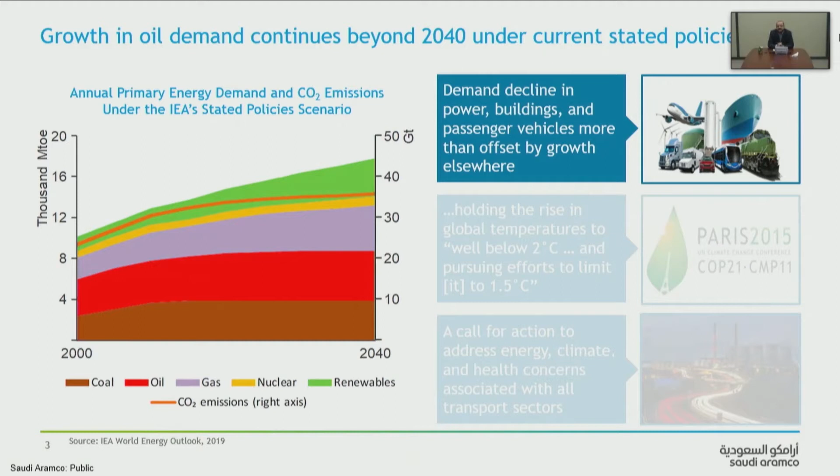As this slide shows, global primary energy demand continues to increase. We are seeing demand decline in power, buildings, and passenger vehicles with alternative technologies and renewable energy. But the reality is that it's more than offset by growth elsewhere, mainly in non-OECD countries. Although demand is plateauing and declining in many OECD countries, the rest of the world continues to grow due to the drivers of economic growth.

Under the IEA stated policy scenario, there are many drivers for that. We see aviation and shipping, because of the difficulty of decarbonization, will continue to grow oil demand. I'm looking specifically at oil demand here. We see petrochemicals as a huge growth area for oil, although that's not combustion related, and we see several other areas where we think there will be additional demand.

Even in the policy scenarios, internal combustion engine vehicles will continue to grow, in fact. Conventional cars will continue to be a large share of the vehicle stock through 2040. In this analysis, conventional car sales may peak by the late 2020s, but even by 2040 they still represent a very large share.

And by 2050, transport is still going to constitute a lot, it will actually increase its share of global CO2 emissions because of that. So energy efficiency is an essential element going forward, and we expect that most of the reduction in emissions will come from energy efficiency.

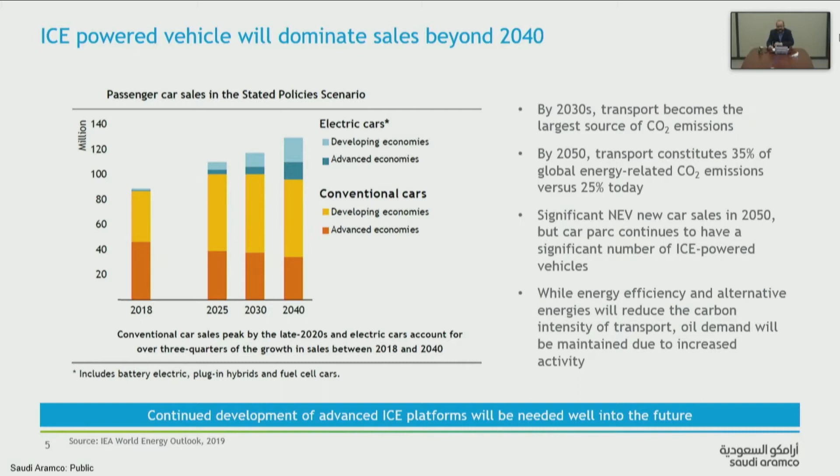But in a carbon-constrained world, the biggest challenge is how do we reduce that climate concern of additional CO2? How do we hold the global temperature rise to well below 2 degrees C? How do we reduce those CO2 emissions? With 25% of that coming from transport, we are expected in the transport sector to deliver about 20% of that reduction.

As you know, the Paris Accord requires each sector to reduce its carbon footprint. For example, EU transport emissions represent 24%, and the expectation is that there will be deep decarbonization across that sector. So the challenge is, how do we address this dual challenge of meeting the growth of the world's economies and reducing their emissions?

Of course, it requires several policy options and technology options. Many of the opportunities are actually in avoiding the need. This framework here is well-known: avoid, shift, and improve. I'm going to focus today on improve, which is really improving the use of energy and especially efficiency, as well as alternatives.

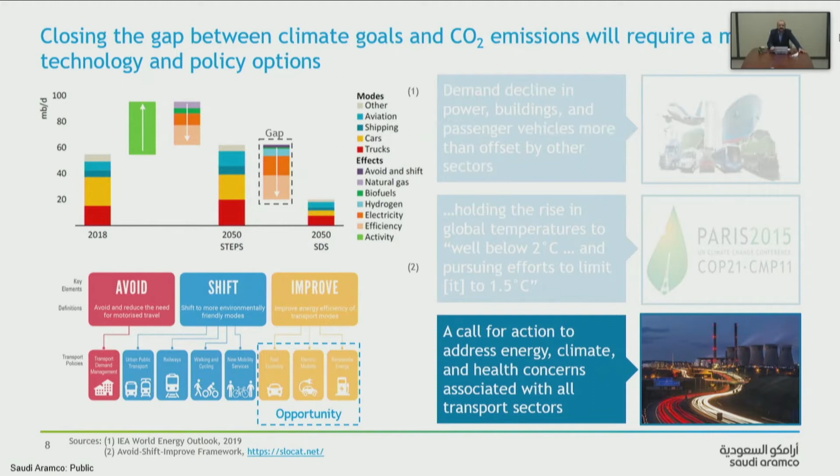So the challenge is really meeting the most challenging targets, meeting EU decarbonization ambitions. If you look at the options the EU is looking at, and we have looked at them, there are many opportunities in efficiency and hybridization, but that will only get us, in the case of light-duty vehicles, about 30% of the way there. Similarly, for the heavy-duty sector, we see about 20% improvement from efficiency and hybridization.

The rest of the way has to be met with either electrification, fuel cell electric vehicles, or a relatively recent topic, renewable fuels. For aviation and marine, the best chance is renewable fuels and offsetting, which has been recognized by the International Civil Aviation Organization. For marine, we're also looking at mobile carbon capture as a potentially competitive option, as well as other fuels such as ammonia and hydrogen.

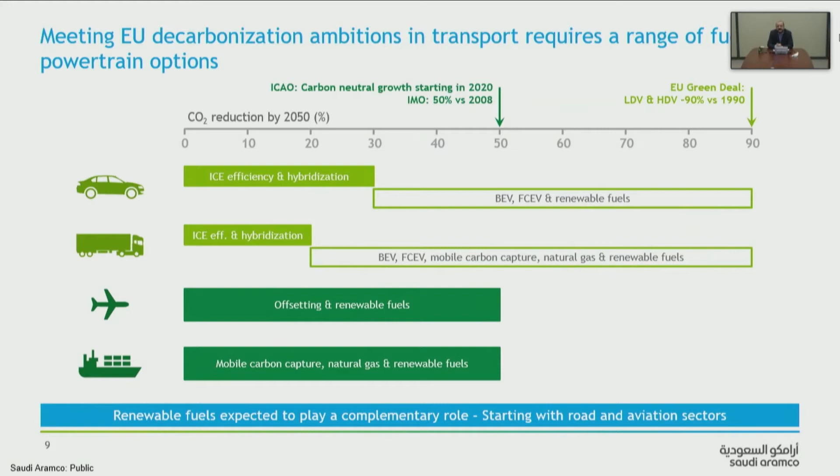So the point I wanted to make here is that even in a decarbonized world, our best options may not always be electrification in the traditional sense. In fact, renewable fuels may play a big role in being able to decarbonize the transport sector.

If we look at EU transport options, by 2050 we think there needs to be about 3.7 gigatons reduction of CO2 emissions from the transport sector. If you look at two options: electrification only, with no internal combustion engine sales after 2030, that's one option. But you could achieve the same decarbonization by introducing a mix of renewable fuels as well as hybrid electric and electric vehicles, perhaps at a lower cost and with less of an infrastructure challenge.

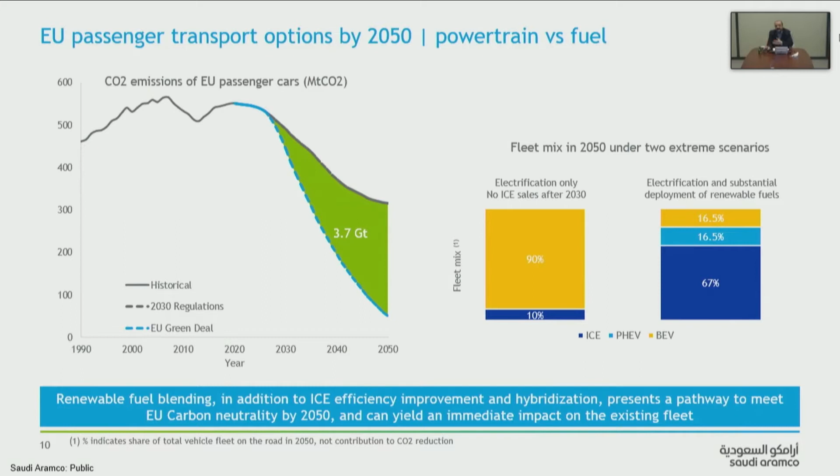So renewable fuels may offer an opportunity to address this decarbonization. Here's a presentation by FEV, which showed the renewable fuels potential of up to one third of CO2 savings by utilization of renewable fuels.

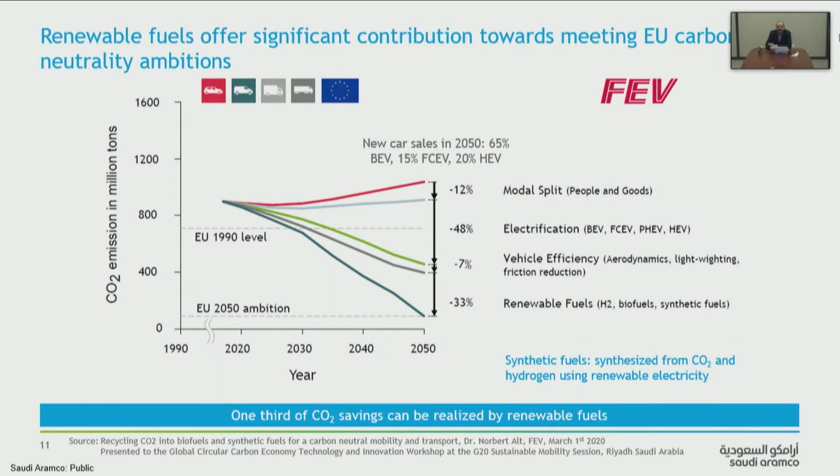So what are renewable fuels? Renewable fuels are the concept of taking CO2 from the atmosphere and combining it with renewable hydrogen and combusting it like any other fuel.

Here we see CORSIA, the International Civil Aviation Organization program for reduction of CO2 footprint. This program seeks to reduce emissions from the aviation sector by 50%. Much of that will come from offsetting, but also from biofuels and what are called sustainable aviation fuels, which would be renewable.

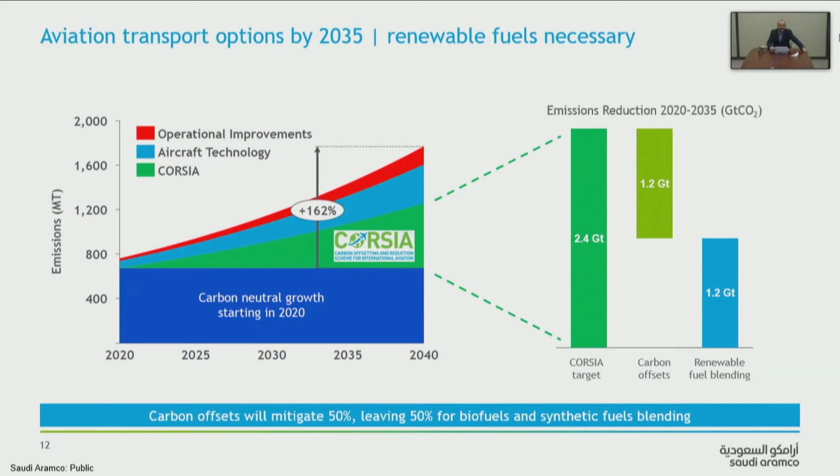Just to compare the carbon footprint of synthetic fuels, we see about one eighth of the carbon intensity of oil-based fuels, roughly. So if you look at an oil-based fuel, it's in the range of 350 to 400 kilograms of CO2 emitted over the full life cycle of a barrel of oil, for example.

About a quarter of that is emitted in the process of advanced biofuels - actually much more for the conventional existing biofuels. But for advanced biofuels, which are being developed as we speak, it's about a quarter, maybe 100 kilograms per barrel equivalent. And finally for synthetic fuels, it's an eighth of that, about 50 kilograms per barrel of fuel used.

So it's very impactful in terms of carbon intensity, having these drop-in fuels that could be mixed with existing fuels initially because of cost, but ultimately, as costs go down, could be the base fuel utilized in combustion.

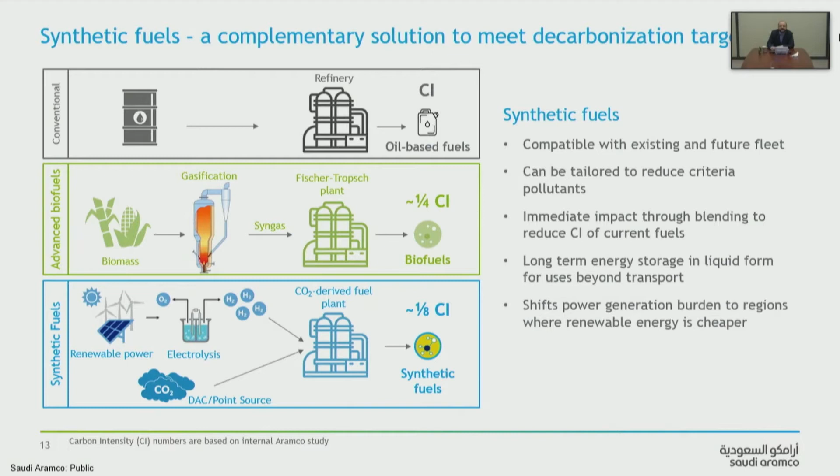And they are technically feasible. They've been proven in many pilot projects. There are a number of projects as we speak - one in Chile today looks to develop synthetic fuels from wind power and hydrogen production from electrolysis combined with CO2 from the atmosphere.

These pilot projects, we think, are scalable, and the viability will of course depend on costs, but we think they're quite competitive compared to alternative means of decarbonization of the transport sector.

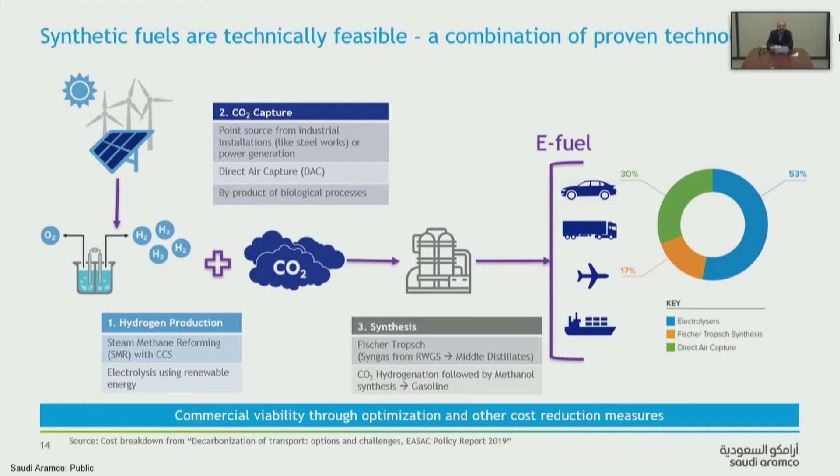One of the reasons we believe it will be competitive is because of the maturing of the technology. Electrolyzer technology has been in the news lately because of the hydrogen economy concepts, and we also see electrolysis and competitive hydrogen by the 2030s, early 2030s.

We see hydrogen from electrolysis and the best renewable energy sources matching blue hydrogen, which would be the production of CO2-free hydrogen from fossil fuels. We think those two will probably meet in the 2030s, early 2030s.

Electrolysis hydrogen will probably match the cost of decarbonized carbon capture with methane, for example, in the cheapest methane locations. That would be an amazing result, which would allow electrolysis and renewable energy to compete for liquid fuels ultimately.

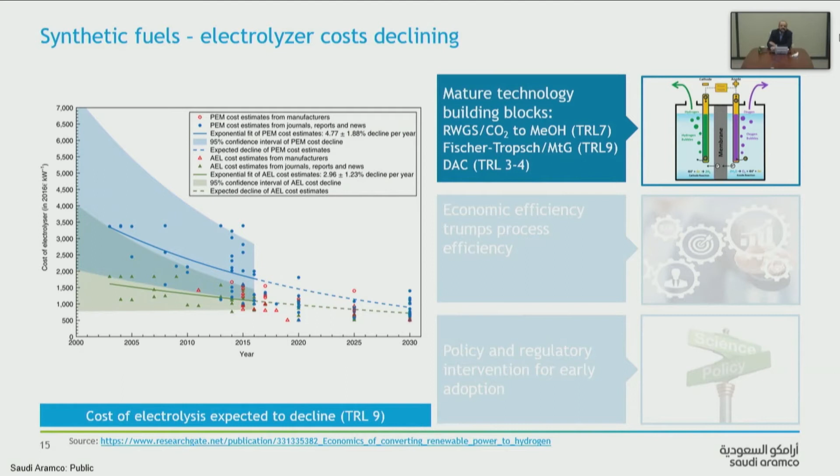The big challenge, of course - many are questioning the viability of direct air capture, and I have to admit I was a skeptic in direct air capture until a number of recent pilots were conducted over the last few years, demonstrating that it's possible to bring down the cost of capturing CO2 from the atmosphere to practical costs. We think it's achievable to reach $100 per ton with the technologies available.

Which makes actually quite a competitive liquid fuel from synthetic e-fuels. Because CO2, the carbon, has about a one third effect on the cost of the synthetic fuel - the CO2 requirement. So it's not the biggest part.

The biggest part is actually the energy needed to produce the hydrogen. So it's quite an interesting fact that the economics are not as driven by the CO2 capture as much as they are by the H2 production.

And therefore, even at those high costs of $100 a ton of CO2 direct air capture - today, of course, I have to say it's in the $400 to $600 a ton range, as we've seen in pilots for CO2 direct air capture - we see a path to $100 in the near future, and that's exciting. That $100 would be quite attractive for production of liquid fuels from renewables.

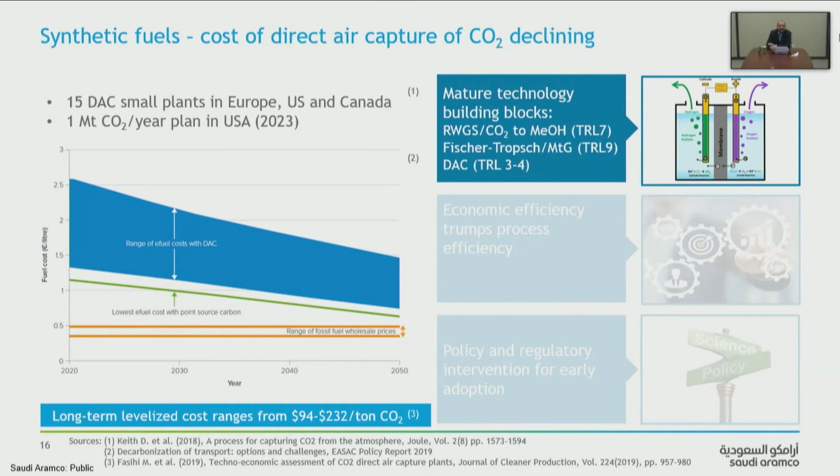And of course, the question always comes about efficiency. In the end, economic efficiency trumps process efficiency. We have been running gasoline, light spark ignition engines at 25% efficiency for almost 100 years, although diesel has been available at 40% and above efficiency. The reason is it's cheaper. It's more elegant to have a more efficient process, but in the end, the consumer cares about cost. So discussions around overall process efficiency are very nice and academic when it comes to the market at the end of the day.

So if it works and is cheap enough, it will win the market. That's my point on this. I understand the long-term overall process efficiency of synthetic fuels doesn't look as good as other fuels, but in fact, what matters is the price at the pump.

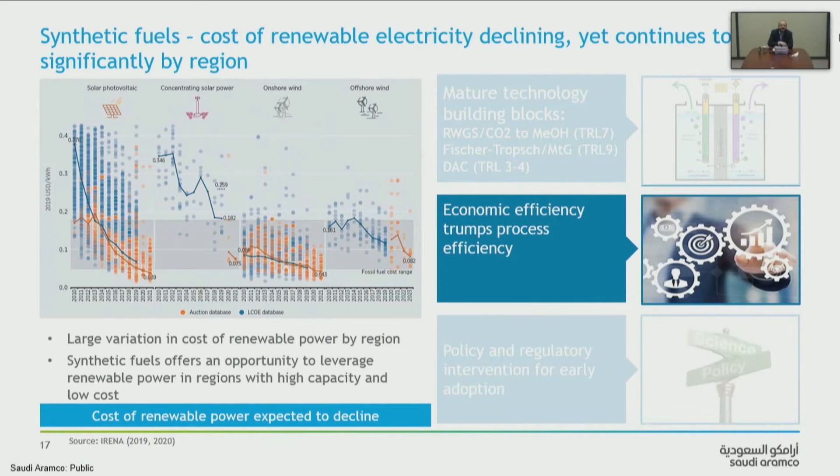And of course, as I said, there is an efficiency disparity if you take renewable fuels and utilize them in a battery electric vehicle versus using them as a liquid fuel, much lower efficiency. I have to say two things. One is the efficiencies along the chain of synthetic fuels are improving because it's a very immature technology at this point. So we expect electrolyzer efficiency to rise from the 60s and 70s, where it is now, to probably 80 and 90 in 10 years' time. 90% efficiency is probably a good number ultimately for the peak of electrolyzer efficiency.

And then for the processes to go from hydrogen to liquid fuels, we also expect efficiencies to rise there. So we will see an improvement probably into the range of competition with fuel cell electric vehicles, which are already economic in some markets.

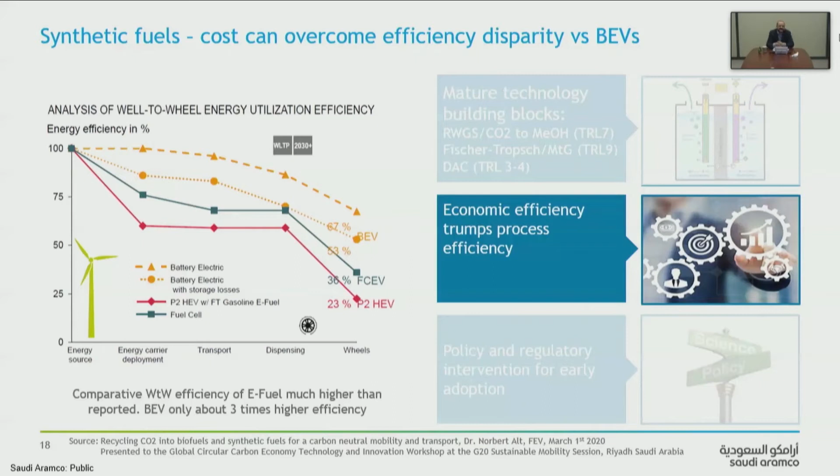Of course, in order for them to work, they have to be recognized by policymakers. And at this point, it's still early in the rules and regulations being established in different markets. But I think there is a beginning. We're seeing in Europe a recognition of e-fuels. The International Civil Aviation Organization has also given, I would say, a green light to the development of e-fuels in the form of the CORSIA regulations for sustainable aviation fuels. So I think policy is moving in that direction.

I think as industry starts developing more and more pilots, we see the one in Chile, we'll probably be seeing one in NEOM as well, a similar project in Saudi Arabia, and other locations. As we develop these synthetic fuels and show their competitiveness and flexibility, I believe policymakers will respond and regulators will recognize the benefits.

So just to compare synthetic fuels, we can see here we've shown biofuels, conventional biofuels, in cost per ton. Now, I want to emphasize that this isn't normalized in the sense of energy. This is a cost per ton. But in fact, when you normalize for energy, or even better, for carbon footprint, which is the main purpose of introducing e-fuels, there's a tremendous advantage of e-fuels over the other fuels shown here.

So, for example, we see that advanced biofuels are quite expensive to produce. They have lower carbon footprints, but e-fuels actually have half the carbon footprint of advanced biofuels. And so if you normalize for CO2 mitigated, the difference is even more dramatic. You see e-fuels will have a much lower cost per ton of CO2 mitigated. And of course, conventional biofuels are terrible in that sense. They look low cost today, but because they have a quite significant carbon footprint, they would be a much higher cost of mitigation, doubling or tripling what you see here relative to e-fuels.

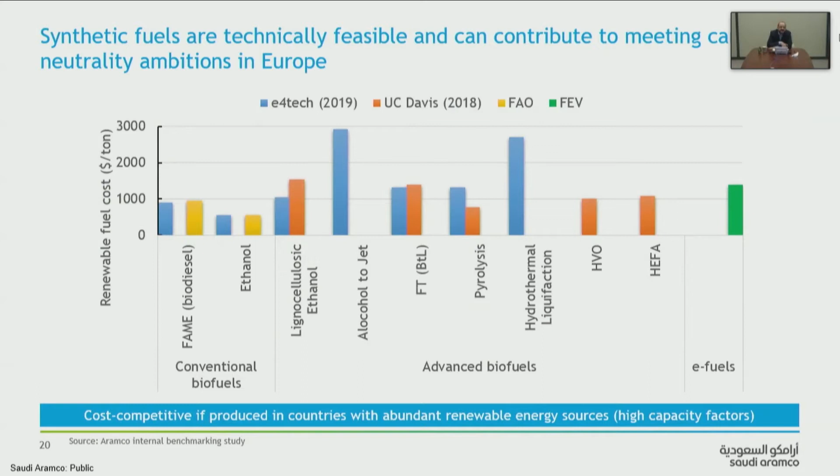So I think maybe this diagram, if done on a CO2 basis, might have been more dramatic. And I think it's something we can discuss in the question and answers.

So the challenge, of course, is really coordinating this triangle of government, policymakers, fuel manufacturers, and automakers. As usual, starting a new market is a chicken and egg kind of situation. You need to have the infrastructure in place. You have to have the fuel before you can do the engines. The engines won't be made unless the government has regulated and allowed the fuels and the engines to be made. So it's a big challenge.

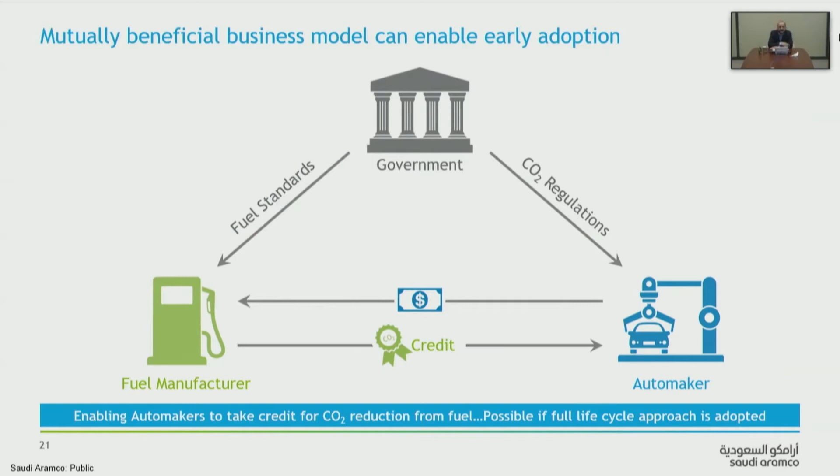We see a lot of ways of doing this. It will need consortiums of, say, automakers and fuel manufacturers to collaborate with government support to be able to utilize the credits from synthetic fuels, to meet the standards that governments set on CO2 regulations, just as they use today credits from battery electric vehicle manufacturers.

Of course, initially we would see this as being a low carbon blending fuel. Here I'm showing two projects we're working on, one with Repsol, where we are looking at developing synthetic fuels in Europe using renewable energy, and using it as a blending fuel to allow reduction of CO2.

So there's a number of projects we're working on, both on synthetic diesel and aviation fuels, as well as synthetic gasoline, which we'll be announcing in the future.

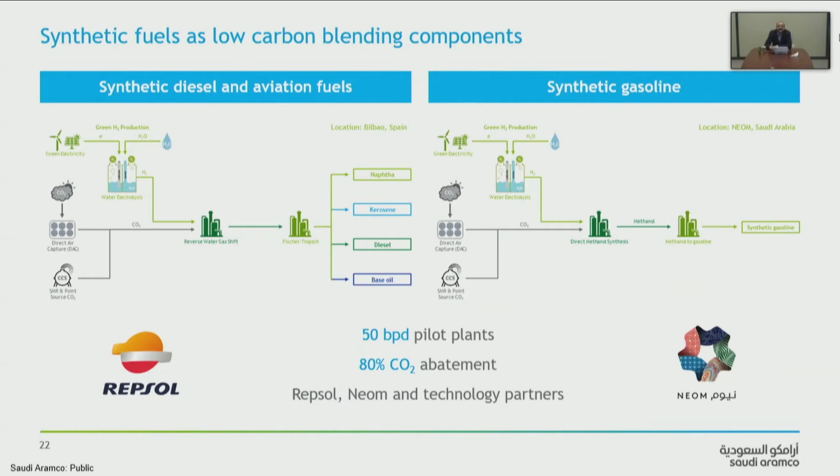The interesting thing about synthetic fuels is not only are they interesting from the point of carbon footprint, but they're also very interesting from the design and minimization of criteria pollutants, because we can design these fuels the way we want, in many ways, as much as possible. They're limited by the chemistry, of course, but we can design them differently from what we get in what we call the traditional fossil fuel.

So we can improve certain parameters, lower NOx for example, increase oxygenates. There's a number of different design parameters that can be influenced in the processes of methanol to gasoline or Fischer-Tropsch, or the other newer processes that we're looking at as well.

So there's a lot of potential to leverage that combustion research to look at high quality fuels and, of course, reduce after-treatment.

And the challenges there, of course, are catalyst synthesis and applying some of the new fuel design tools that allow simulation of the whole process end to end. So we can design the fuel to match the engine architecture and simulate all of that process quickly and efficiently.

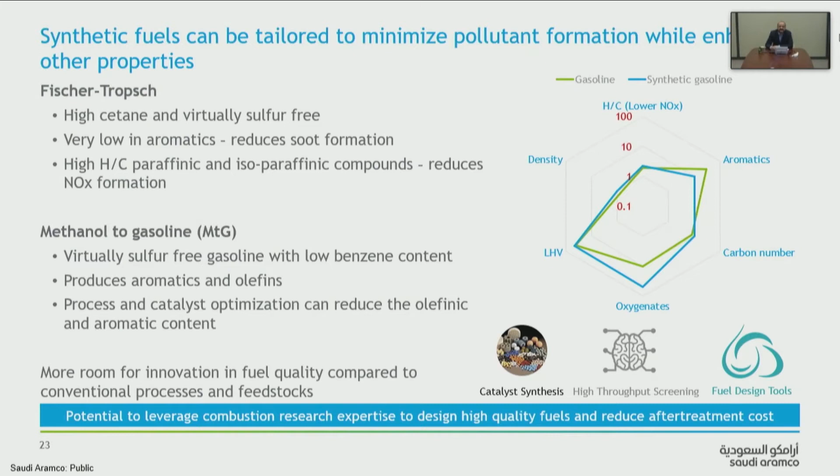It is true, I think there's a huge need for electrification as we go forward because it adds a lot of efficiency to the energy system in general. But there are large parts of the energy system, in transport especially, which are out of the existing performance envelope of electric vehicles. It will take a lot to get there. And I think many people who are extrapolating the growth curves are not familiar with those particular performance boundaries of the existing battery technologies.

Now, we know battery technologies are being developed continuously, but the fact is there will be a long time before we see some of these leave the lab, and I think it's going to take a while. The best thing we can do is actually improve combustion efficiency and combustion performance as we go forward.

So we call on policymakers to establish a framework for the introduction of a level playing field, to allow a technology agnostic policy, which would allow the technologies to compete on the target of reduction of carbon footprint and emissions. And I think tailor-made e-fuels can be the solution in many cases.